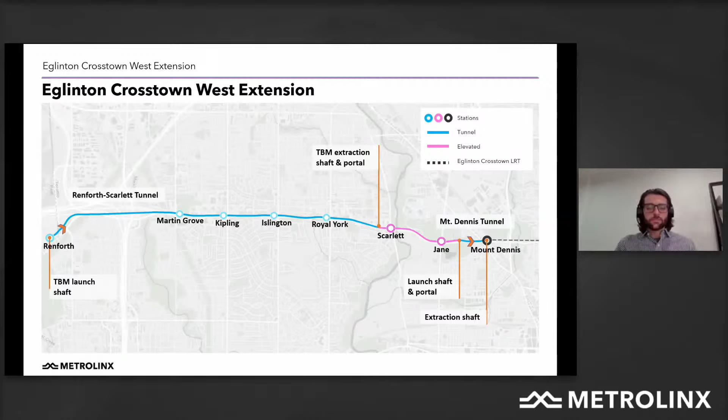So I'll lead the first part of the presentation, and this is a collaborative session with our West End Connectors partners this evening. So excited to talk about tunneling and the construction updates that are really happening in the community. So that's awesome. So to start off, we've got a map of the project here. Tonight we'll be focusing on the area highlighted in blue, the Renforth to Scarlett tunnel that's just starting construction out at the launch shaft at Renforth in the city of Mississauga. We can go to the next slide, please.

A bit of the facts about the project and benefits that we've outlined for folks that haven't been part of these virtual engagements before, or that are just looking for some additional information. The project is a 9.2 kilometer extension of the Eglinton Crosstown LRT project, currently under construction. The extension travels from Mount Dennis Station all the way out west into the city of Mississauga and terminates at Renforth, with a future connection being planned to the airport at Toronto Pearson.

The project has 7 stations in total, and some of the exciting facts that we see as benefits to the community: we'll see over 37,000 boardings on a weekday, which shows great ridership and demand throughout the Eglinton West corridor. There's lots of benefit to traveling faster between parts of Toronto and west into Etobicoke and into Mississauga, so 14 minutes travel time faster. These are some of the great benefits we plan to deliver for the community as we're constructing. Can go to the next slide, please.

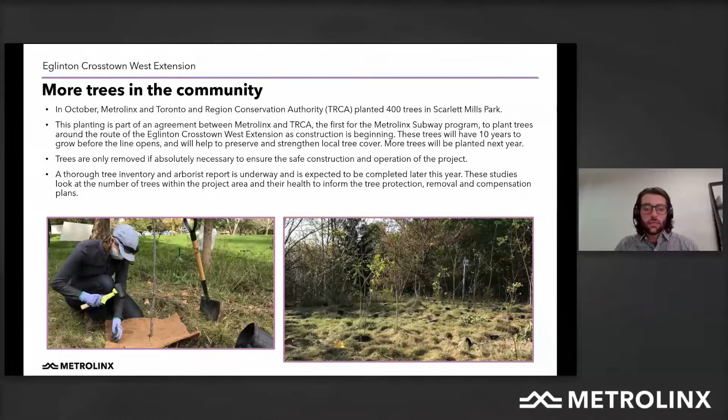Secondly is an exciting competition for the community and residents to take part in. Through our West End Connectors folks, we are progressing on the manufacturing of the tunnel boring machines. For Eglinton West, we'll need 2 tunnel boring machines to dig the tunnels across the alignment. As part of a tradition in the construction, tunneling, and transit worlds, we'd like to name the machines, and we're looking for input from the community. It's a tradition done across the world, which we're carrying on from projects like the ECLRT and other tunnel boring projects the TTC has undertaken. So it's your opportunity to provide submissions; we need 2 names, a pair of names.

Submissions through our Metrolinx Engage website are due by November 18th, so you have just over 2 weeks. And that's phase 1 of the competition. The second phase of the competition will judge the naming submissions that we've received, and we'll announce winners and have a potential photo opportunity for the winners to visit the site and see the TBMs before they launch into the ground in 2022.

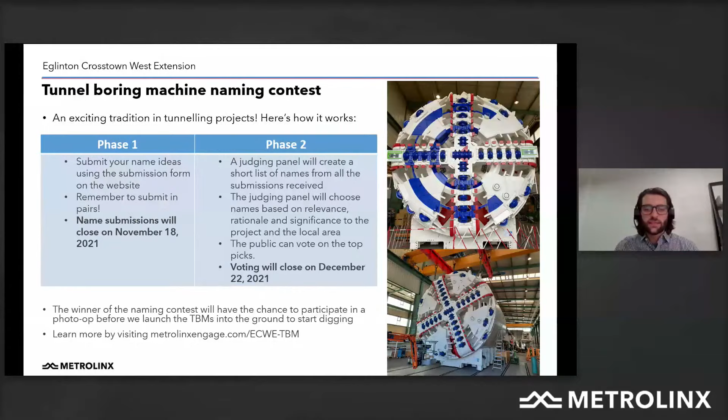Here we've got a project timeline for the overall Eglinton Crosstown West Extension. The project is planned to be constructed in multiple different areas. We've got the Renforth to Scarlett tunnel, which is the focus of the discussion tonight, and Fernando and team will dive into more detail on some of these construction activities and timelines. The launch shaft construction started this year, the tunneling will start in 2022, and completion is in and around 2025.

Below there, we've got other parts of the project that we're looking to deliver in approximately the 2025 timeframe, all the way out to 2031, when we plan to have an operating railway where passengers can enjoy the west extension all the way out to Mississauga and beyond to the airport.

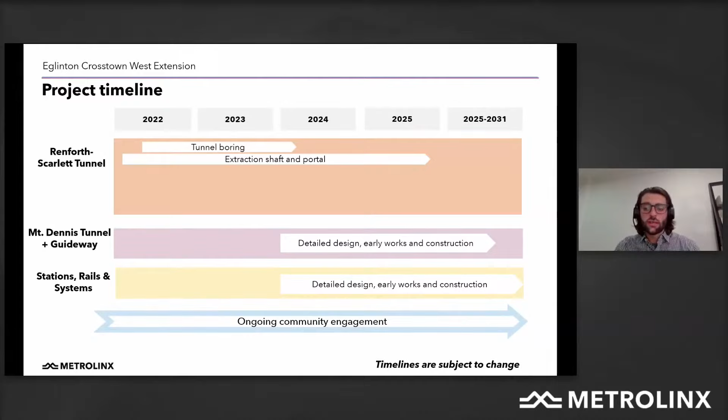So with that, I encourage folks to take the opportunity to ask meaningful questions to our West End Connectors partners this evening. We have our great experts on the call that will field the questions. And with that, I'll hand it over to Fernando to talk in more detail about the advanced tunnel construction from Renforth to Scarlett. Thank you.

Thank you very much, David, and good evening to everyone. This slide covers the timeline for this advanced tunnel contract, which is the scope of work of West End Connectors, and basically consists of the construction of the tunnel and the different facilities necessary to support it. The first activity is the construction of the launch shaft, the shaft that permits the assembly and launching of the TBM. This is well advanced, as you will see in the next slide.

After that, starting early next year, we expect to start the assembly of the TBM. The TBM is already manufactured, is being shipped, and is expected to arrive in Toronto between late this year and early next year. In spring, we expect to launch the TBMs and start tunneling, which will take around 20 months. So we expect to finish the tunnel around the end of 2023 or early 2024.

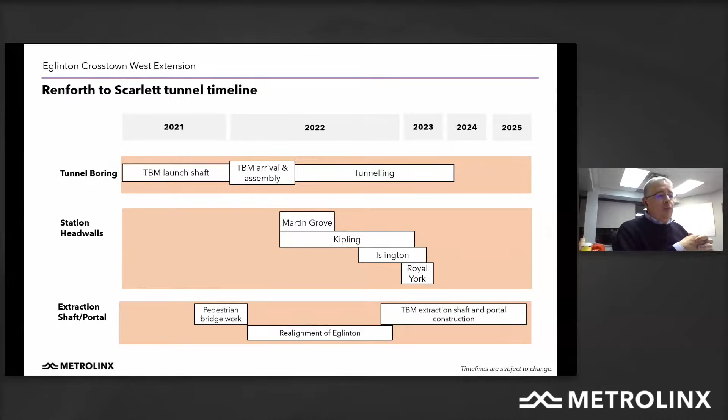So basically, instead of doing continuous temporary detours, the idea is to do the realignment at the early stages, at the very beginning of the works in the area, so that will minimize the impacts to the traffic on Eglinton Avenue. Once Eglinton Avenue is realigned to the definitive configuration, we will start with the construction of the extraction shaft and the portal. That will happen at the end of 2022.

Next slide, please. The tunnel boring machines, as I mentioned before, are already being manufactured and tested in the factory in Germany, the very best manufacturer in the world for this kind of machine. They are being shipped in pieces. As you can see in the images, these are really big machines, 80 meters long, so they have to be shipped in pieces and will begin to arrive in Canada at the end of November, arriving at our site in Mississauga probably in early December.

The TBM is expected to be assembled starting in early 2022, probably around March or early April 2022, at our Renforth launch site. The tunneling, as I mentioned before, is expected to start in spring 2022, moving from Renforth in Mississauga to Scarlett. All the activities supporting the tunnel operation are concentrated at the launch shaft located on Renforth Drive in Mississauga. There are 2 tunnels, 6.4 kilometers long, expected to be completed at the end of 2023 or early 2024.

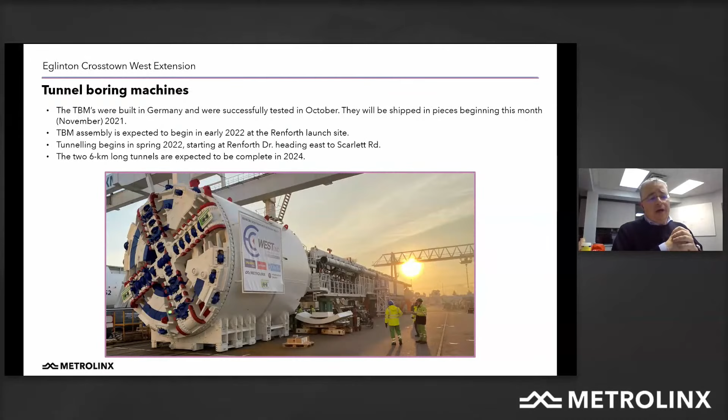Next slide. Here we are presenting for the community an update on the progress of the works. This is our launch shaft here at Renforth. At this point, as you see in the picture, we have already done all the piles around the shaft that support the excavation and permit a stable excavation. We expect to reach the bottom of the shaft at the end of the year. The TBMs launching from this site will dig down and operate at a maximum depth of 20 meters.

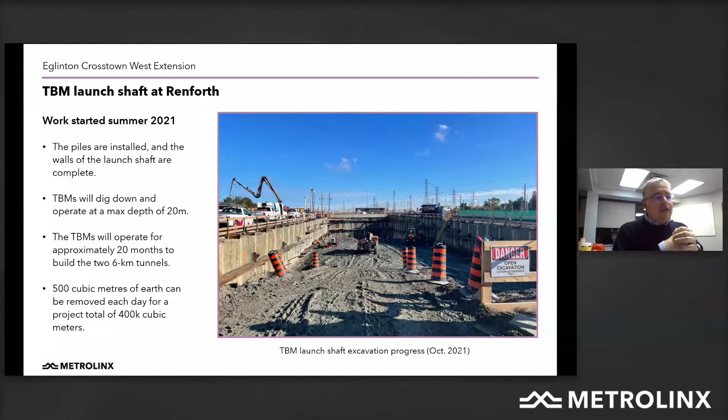The tunnel is expected to be concluded in around 20 months, to build these 6 kilometers. You do the maths, I think this is an impressive production. The TBMs are not only excavating the tunnel but also installing the lining, so they are almost finishing the tunnel at the same time as they advance. We expect an average of 500 cubic meters of earth removed every day, for a total of 400,000 cubic meters of soil and rock extracted through the tunnel with a conveyor belt system. Next slide.

The TBM extraction shaft and portal. This is the point where the TBMs will be dismantled, but it will also be used for the portal, the structure that permits the transition from surface to tunnel. On the right side of the presentation, you can see a picture of a very similar portal on the Crosstown LRT in the city of Toronto, with a very similar configuration, to give you an idea of how that structure works. So basically, we're using it for these 2 purposes.

The construction of the extraction shaft itself has an initial configuration very similar to the launch shaft: basically a rectangular compound done with piles. That part of the construction will start in fall 2022, once the alternative pedestrian ramp has been constructed and Eglinton Avenue has been realigned. The TBMs will be extracted through that extraction shaft. We expect to start their removal at the end of 2023 or 2024, which usually takes around a couple of months. After that, we will continue and finalize the construction of the portal.

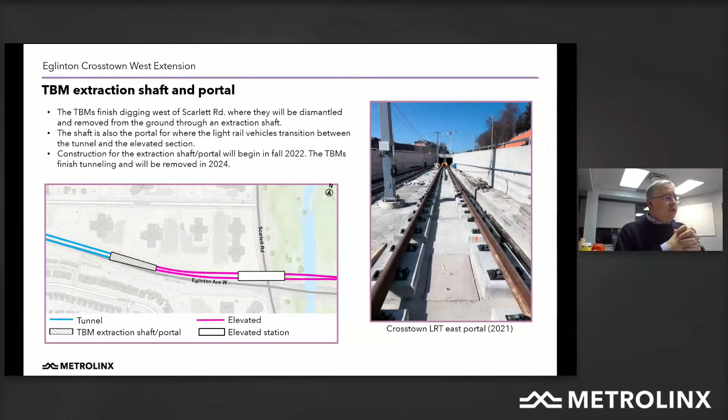So, next slide. In the next slide, we will give you some details of the first stage of construction. The first stage, in the area of the extraction shaft, is constructing the new ramp that will guarantee access to the pedestrian bridge at all times during the construction period. I'm going to hand over to Hayat Muhammad, our traffic manager for West End Connectors, to give additional explanation.

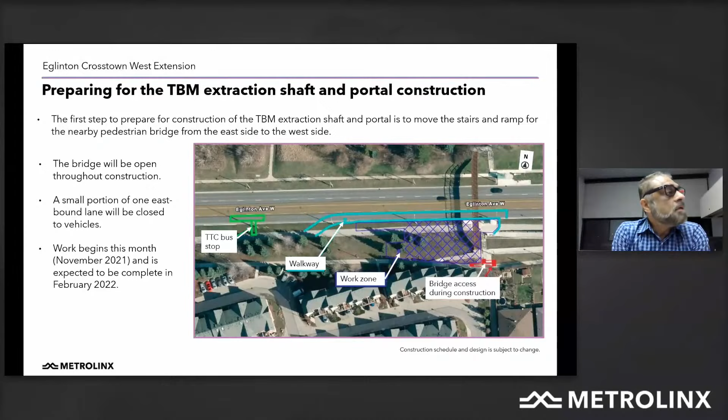So here, this is the overall picture of Eglinton, and the train will come out from the portal and go up to the elevated section. In this phase, we will realign Eglinton to make more room to accommodate that portal, and the south side sidewalk will also be shifted slightly south, approximately 10 meters altogether, and accordingly the cycle track will also be moved. This construction will begin around early 2022.

You can see that there are 3 buildings there, 25, 39, and 61 Richview, and there is an access to the buildings from Eglinton. We will maintain that driveway all the time during the construction phase, but after the LRT is in place, we have to close that driveway.

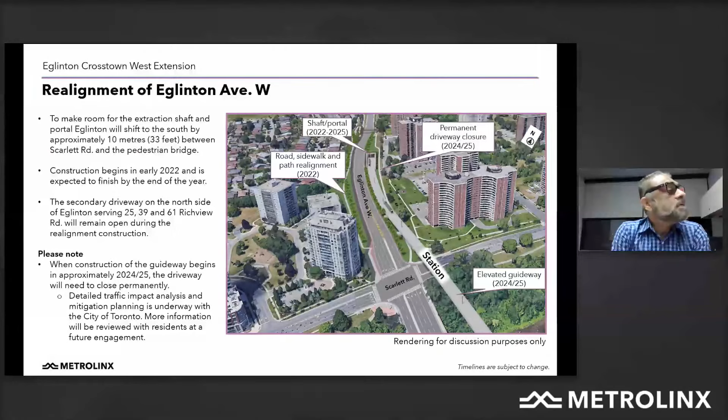We are in the process of developing the model for this entire road network in consultation with our consultants, and we are closely working with the City of Toronto, paramedics, TTC and the fire department to come up with the optimized solution to reduce the traffic impact. So next slide, please. So I think I should hand back over to Stephanie for the next step.

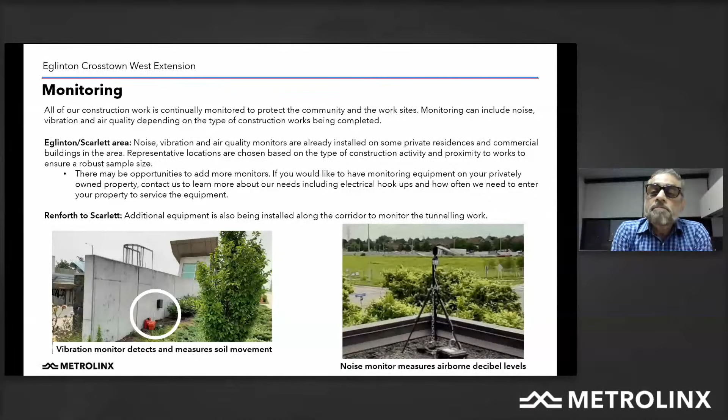Thanks, Hyatt. Just talking briefly about construction monitoring. This project is going to be continually monitored to protect the community as well as the work sites. These monitors include noise, vibration, and air quality, and it really depends on the type of construction that's happening and its proximity. For the Eglinton and Scarlett area, the noise, vibration, and air quality monitors have already been installed on some of the private residences and commercial buildings in the area. You may have seen them, and you can see pictures here of what they look like.

We're also going to be installing additional equipment along the corridor between Renforth and Scarlett to monitor the tunneling work once the TBMs are moving. We can go to the next slide.

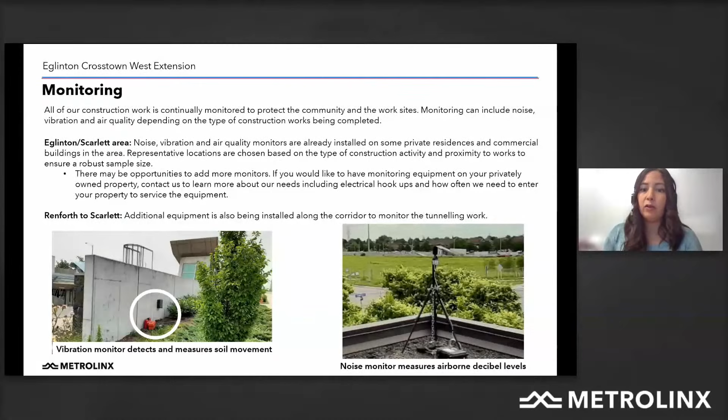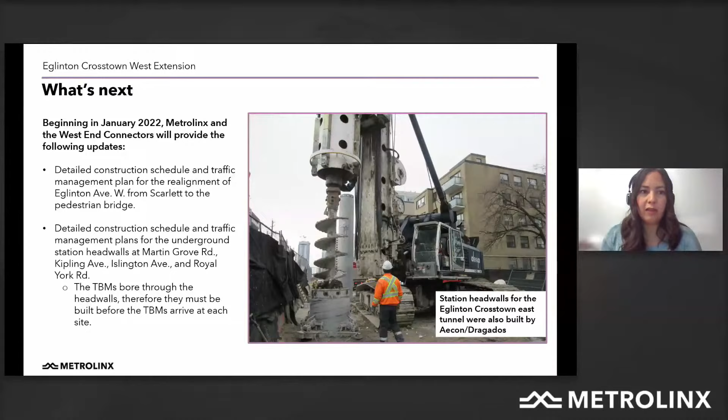So coming up, beginning in January next year, we want to provide more information about the work that's coming up. We'll be providing a detailed construction schedule as well as a traffic management plan for the realignment that Hyatt just went over. We also want to share the more detailed construction schedule and management plans for the underground station headwalls that Fernando brought up earlier, at Martin Grove, Kipling, Islington, and Royal York. So more information to come. Please keep in contact with us to find out when that meeting will be in the early new year. Next slide, please.